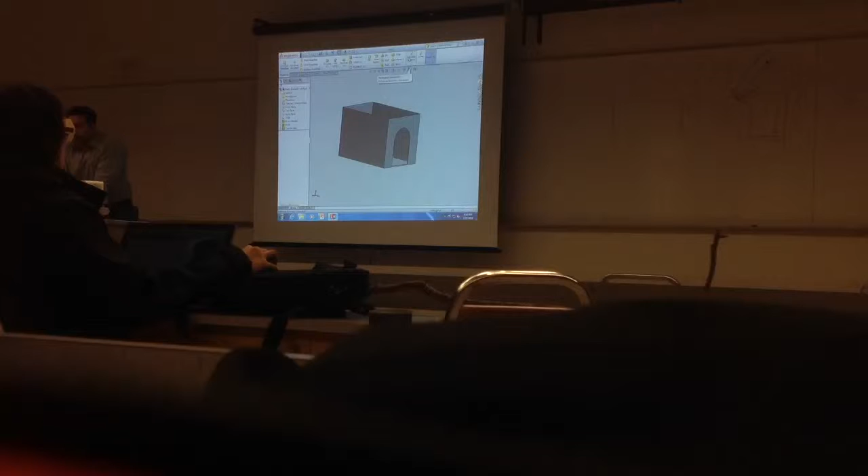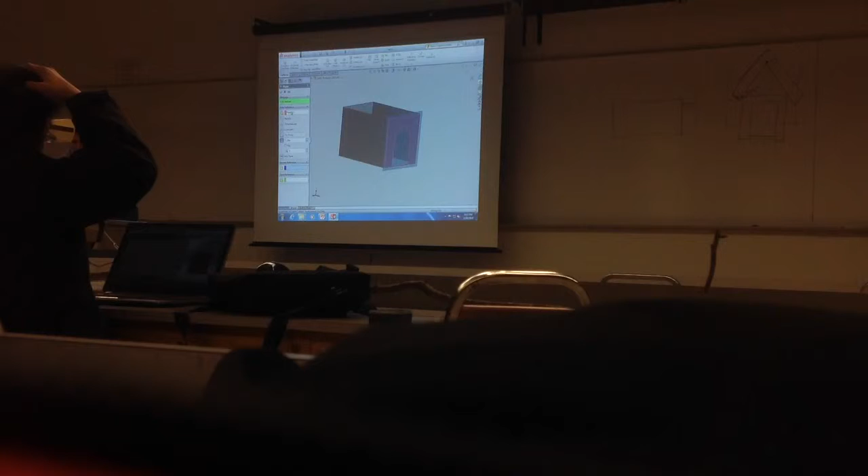The reference geometry, I expand and I click on plane. So it means that I'm going to create the auxiliary reference plane. I click on plane. I click on the front face of my dot as my first reference. So face one is my reference. It gives me a bunch of options for the reference that I choose. The default is distance, which I'm looking for.

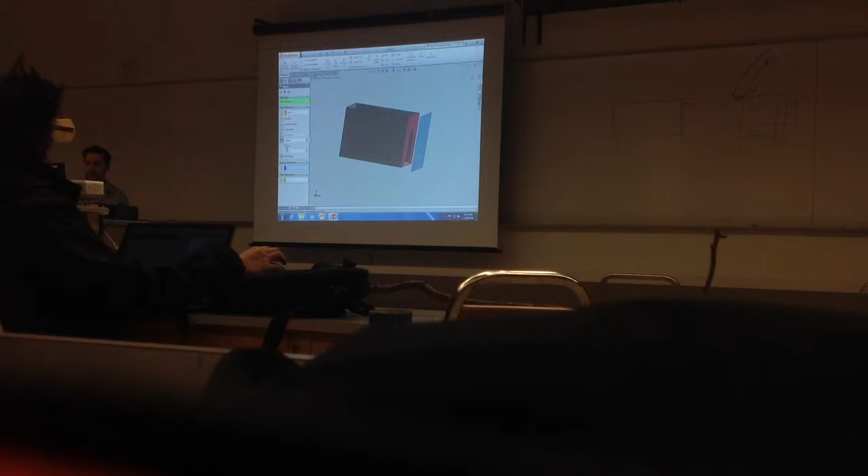For the distance value, I'm going to type 6. I make sure the direction is towards the outside. If it's not, I'm going to flip the direction, which I'm not going to do in this specific case. I simply press OK. So I create the plane as my reference plane, where I'm going to do the sketch of the front of my doghouse, offset at a value of 6 inch.

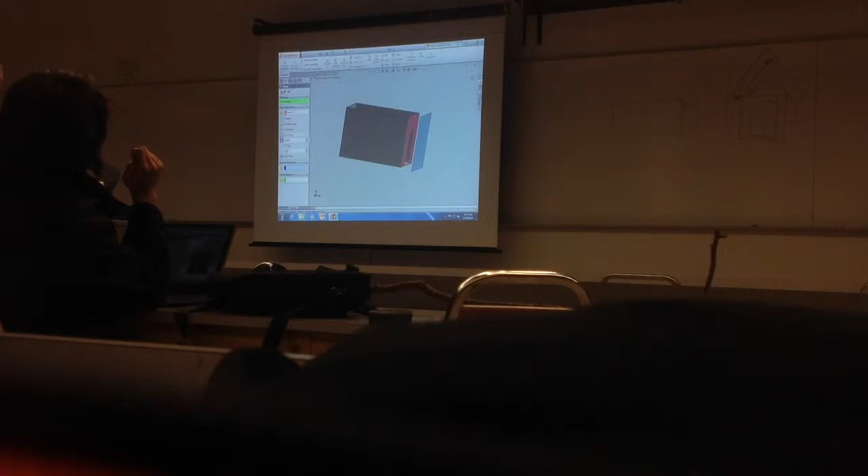Any questions so far? Yes, sir. When you do the first extrusion, maybe it's supposed to use mid plane, so you do things in vertical. Oh, yeah. So when you're doing the extrude, instead of using blind, you use mid plane? For this specific case, like for both ways. So I mean, you can do mid plane.

So for sketch, I think you're saying why don't I do the sketch in the middle, then use a mid plane to extrude on both sides? Yes. That's one way. That's correct. Either way, I have to put the reference plane. I will put the reference plane in the middle, again do the sketch, then use mid plane to extrude on both sides. That's one way to do it, yeah. Correct.

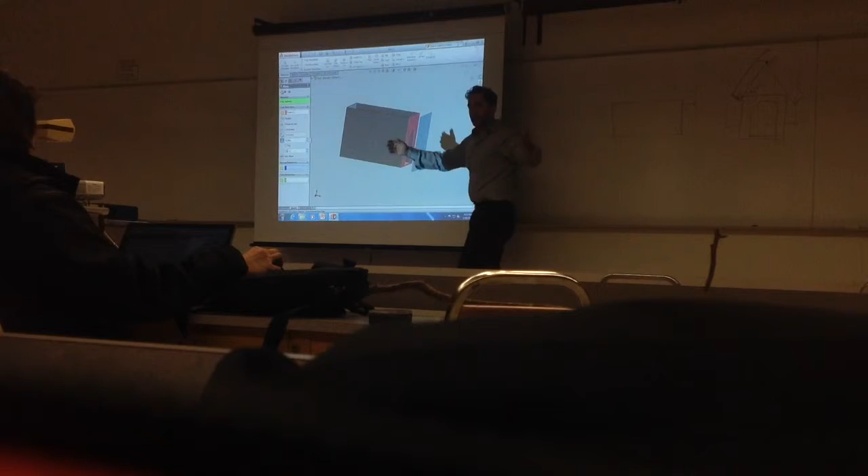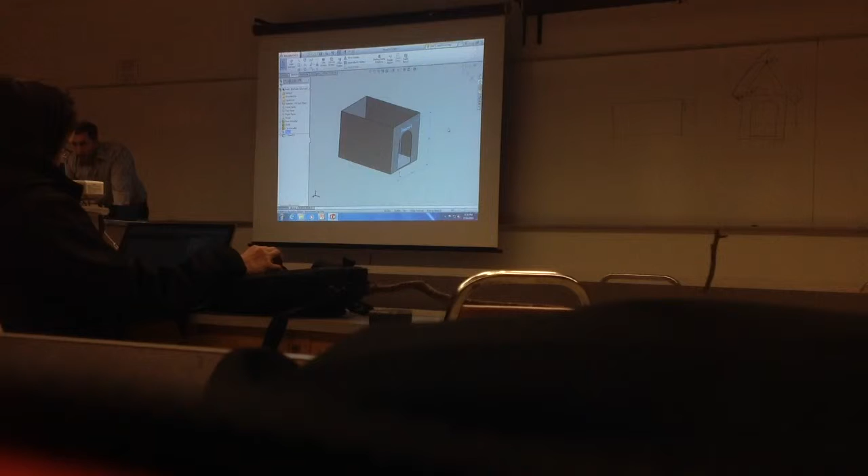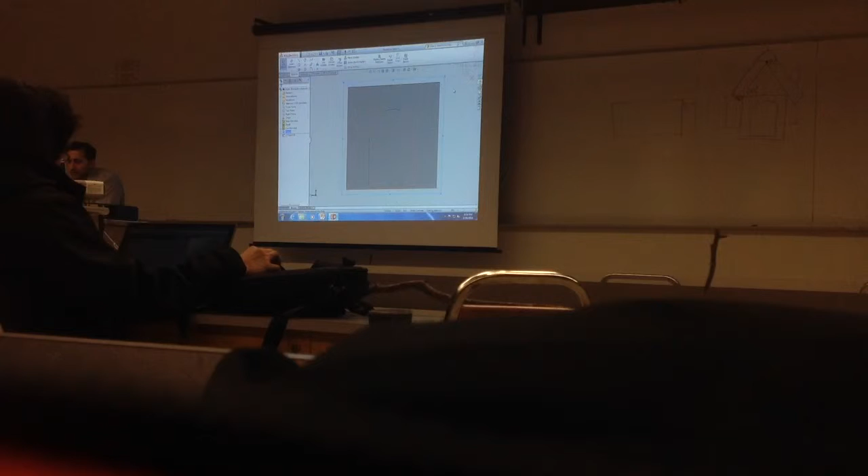So I have this. And I press the green check mark, OK. So I created plane 1, and then I'm going to go to sketch, and I'm going to click on sketch. So plane 1 is my new sketch plane that I'm going to use to create my sketch. So I'm going to make the view normal to my face. Normal. So I'm going to do the same strategy I told you.

First, I'm going to click a line. I'm going to make sure it snaps to the middle, and make sure it becomes vertical, snaps to vertical. I'm going to stretch it up as much as I can. Escape, I'm going to click on the line, and I'm going to use for construction. So I click the first middle line for construction. Click on line?

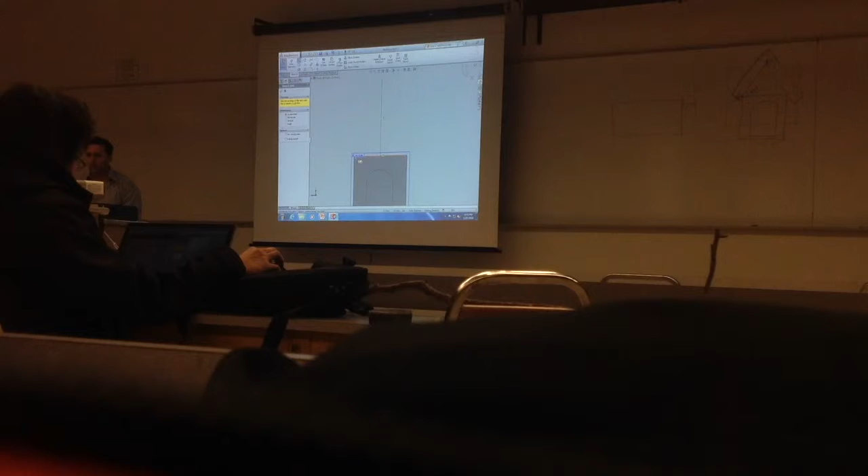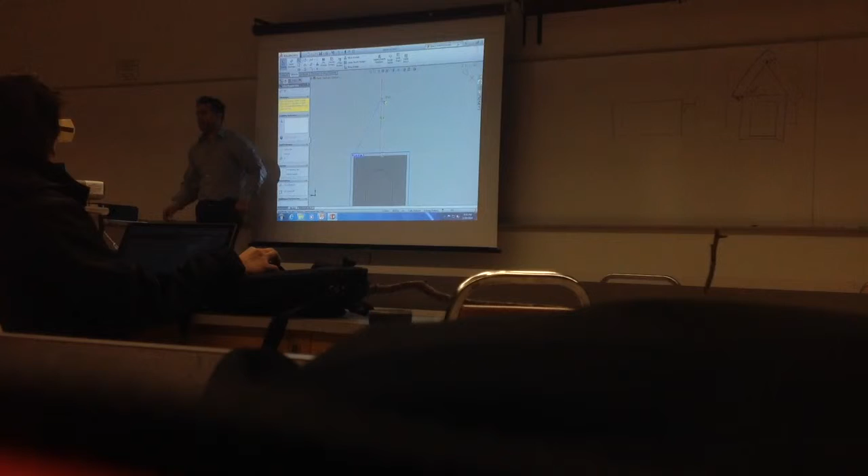Then I'm going to click on the second line again. One end, I'm going to make sure it's coincident on the top corner of my block. And the other end, I make sure it becomes coincident on the line, not in the middle. So make sure you don't select this. And make sure it becomes coincident on the line.

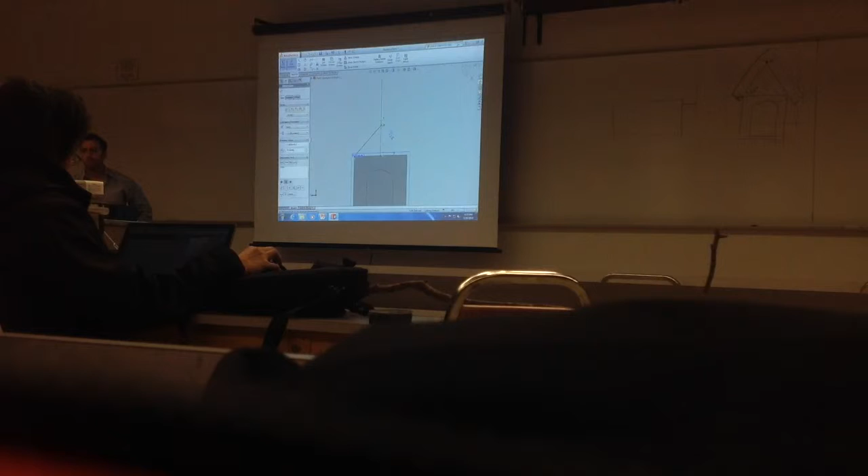And I want to use 45 degree. Is it a solid line or center line? Solid. Click on the horizontal top line and give it an angle of 45 degrees. Did you do it from the corner or random? I want to make this a corner. Mine looks really far away. I click on the line and I click on for construction and press the green check mark, OK. That's what I have.

Yes, sir. What's the difference between a construction line and the center line? Oh, same thing. Yeah, you can go and use the center line, get the same answer. No, he's not clicking it.

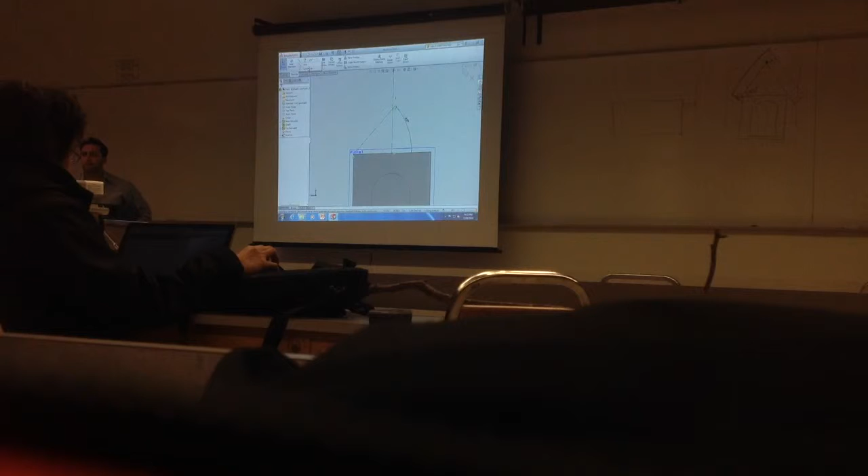Any other question? Is the left side of that line clipped to the corner of the box? Yeah. This corner, I make sure it's coincident on the corner of the box. Okay. And the other end, I make sure it's coincident on the line. This end, you get coincident, yeah, on the line.

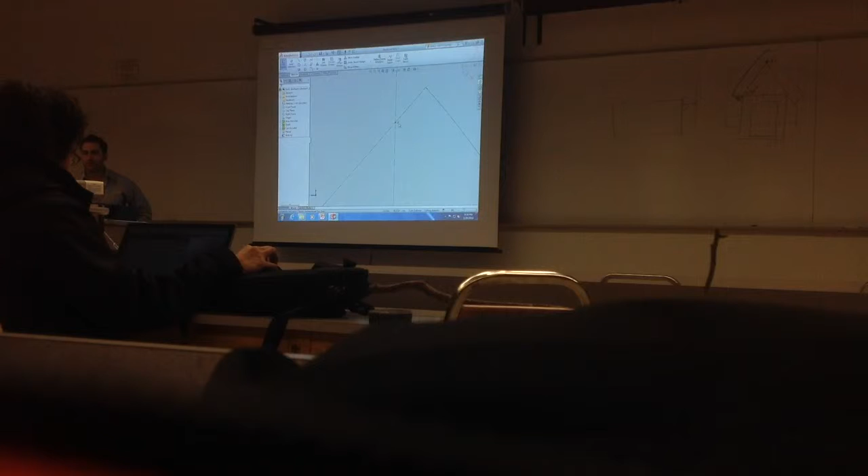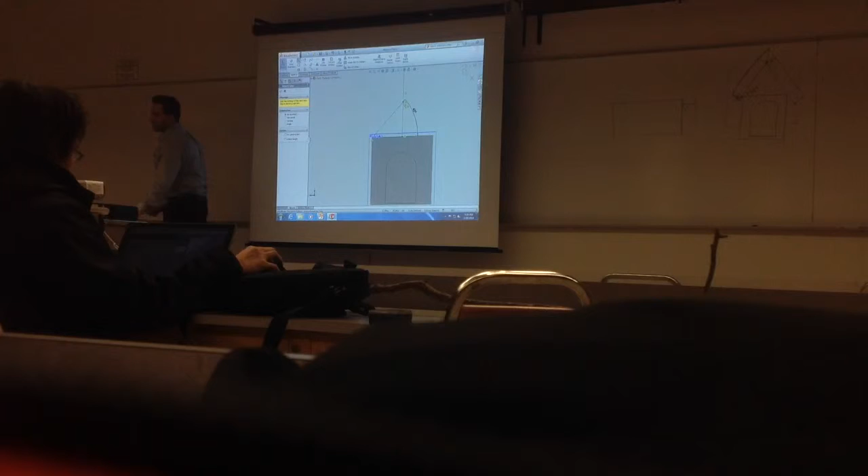So basically, I have everything ready to create my lines. First thing, I'm going to create the bottom line of the roof. So I click line. 45 degrees. I click on this intersection point as the first point of my bottom line of the doghouse. The other point, I click an arbitrary point out there, something like that.

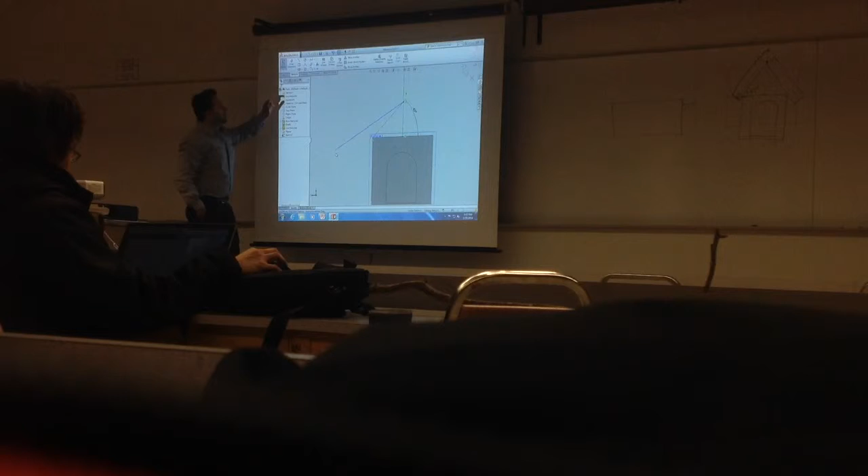I'm not sure. Wait up, I'm trying to see. Professor, my vertical line, how do I make it to be in the middle of the whole? So initially, when you click on the line, you make sure the first one becomes that square, snaps to the middle, so it sits in the middle. Another way to do it, if you have done it already, click on dimension, click on this, click on a line, and give the dimension to be 4 inch on one corner of the box.

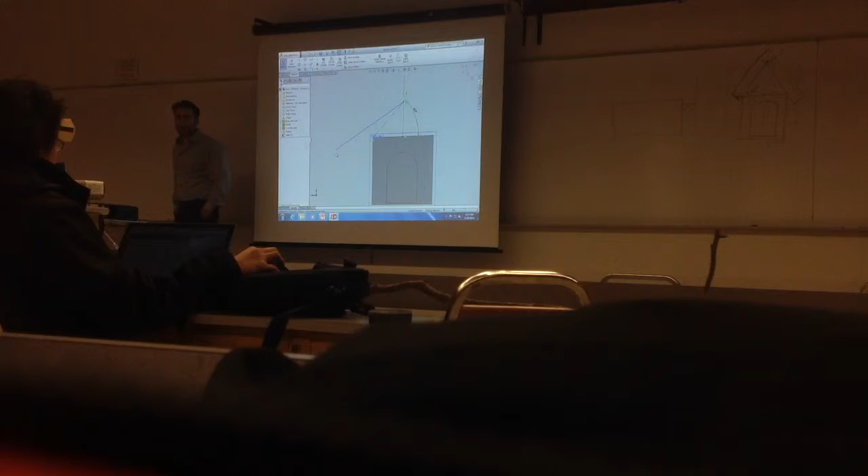But how did he make it degrees too? I'm trying to smart dimension that. I don't know, I still can't figure out the line.

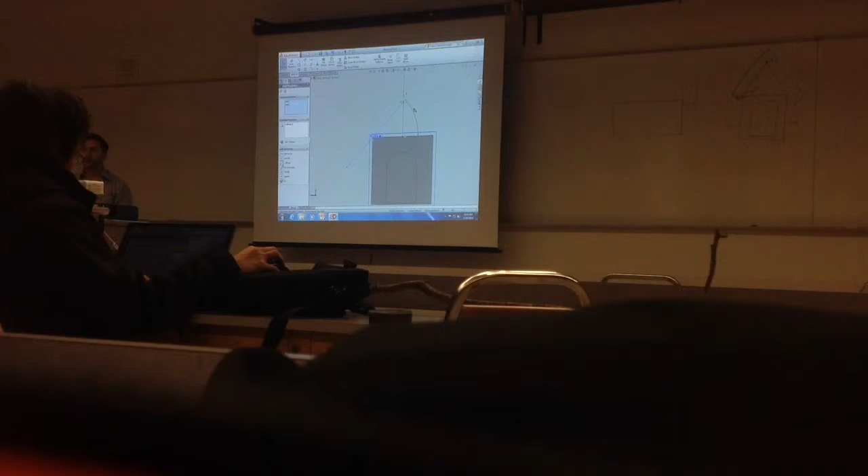So I'm gonna give a relation to make this line to be collinear with this line. So I'm gonna click on the first one, keep the control key down, click on the second line, and give it a relation collinear. See, now it snaps to the direction I'm looking for. The next thing is that I'm gonna give it a dimension of how much? 20 inch. 20 inch. I get the line.

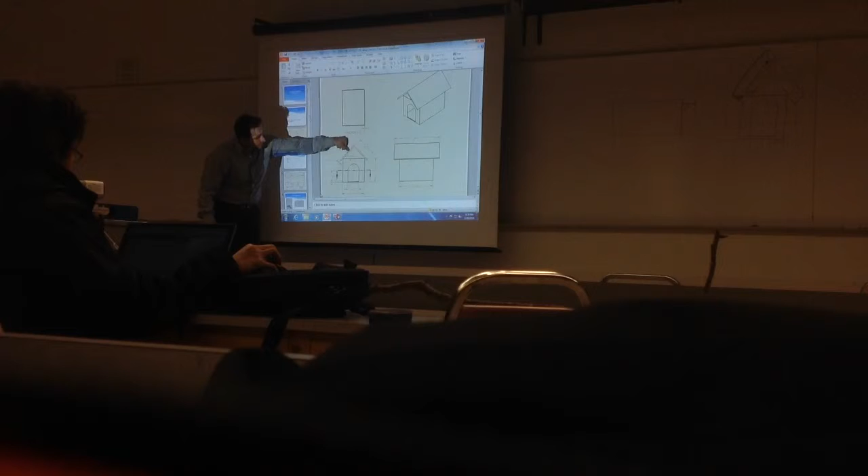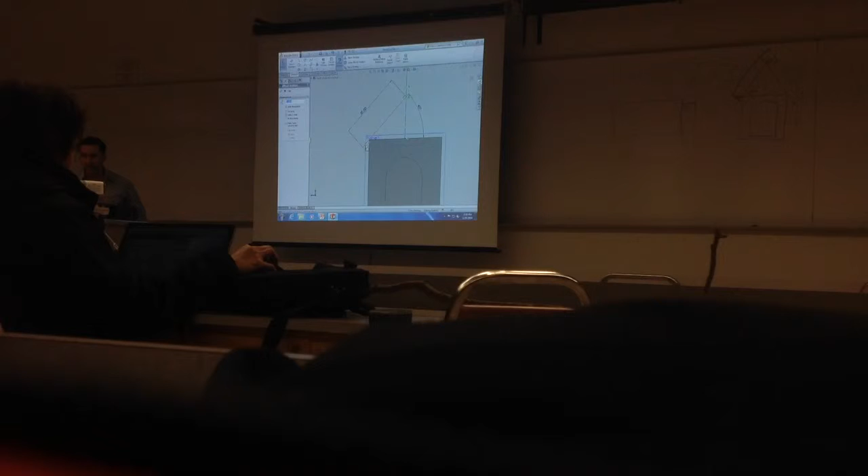The next thing I do, I want to offset this line towards the outside for a value of 1 inch to create the upper part of that. So this is what I did. I created the bottom line. Now I want to create the upper line with the offset for a value of 1 inch. So I go to, let me do this now. Okay. So I go to offset entities in the sketch section. I click on offset entities, click on the line. Offset value is going to be 1 inch.

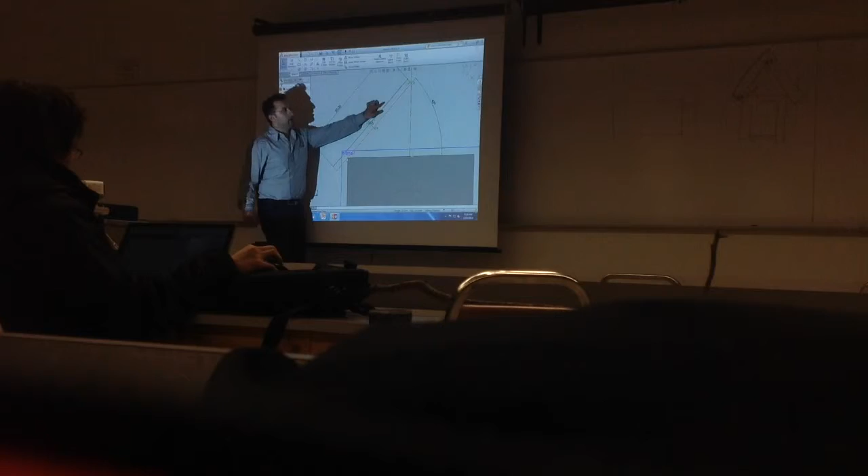This is 45 degrees. So you see, it created the upper part, but it's not perfect. Why? It's missing this gap. So I use the option extend entities in the same section, next to trim entities. If I expand the box, there's the option extend entities.

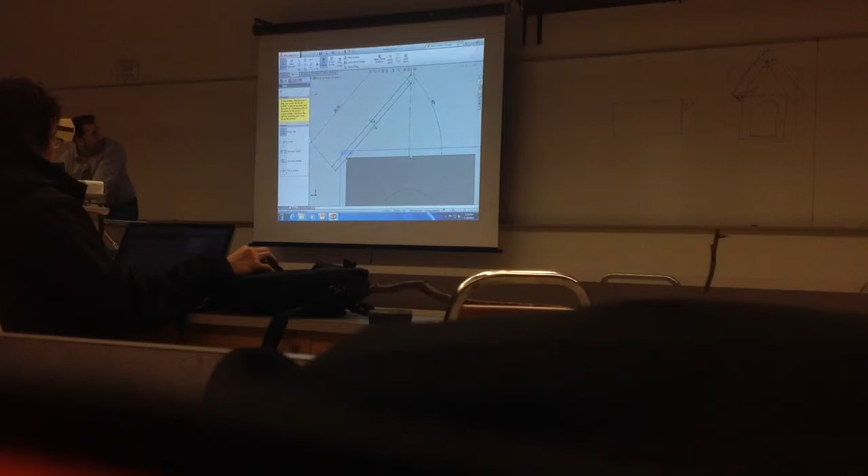Next to trim entities, on the same line, far right? I don't know how to do that. If I click on extend entities, then I move my cursor, see? There you go. I fill this gap. After it's filled, I deselect extend entities. Oh, I got it. What did you do? I have to fill this gap here too. I click on the line, I got it, bro. I fill this gap. What is it? 45.

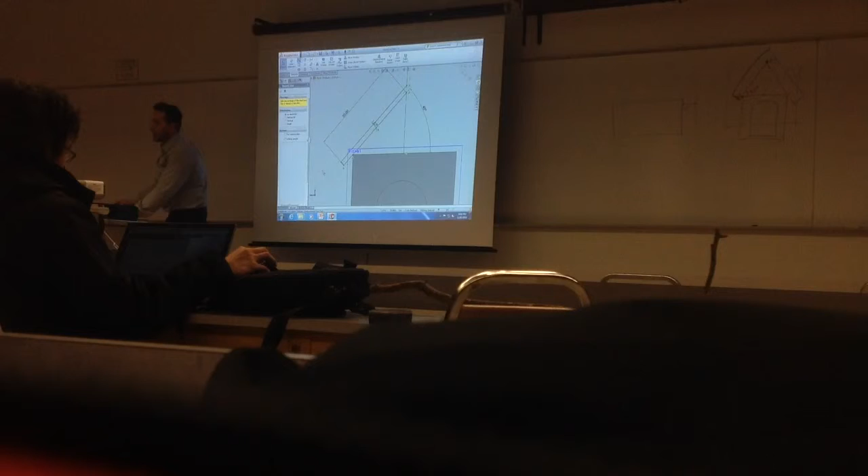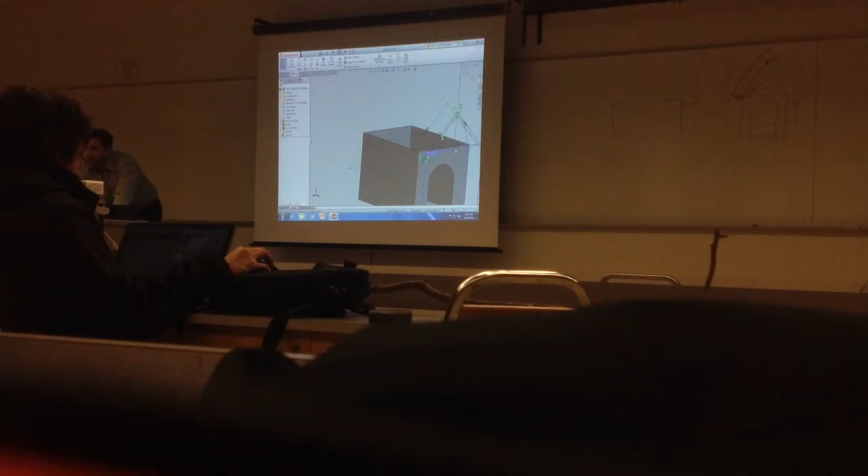Okay. So simply, I created half of the front of the doghouse. I have to create the other half. I use the option mirror entity. I mirror 1, 2, 3 lines over the center line. So simply, I click on mirror entity, what entities I want to mirror: this line, and this line. What I want to mirror it about is the center line. And I simply created the front of my doghouse, which is going to be extruded for a value of 40.

Huh? All on plane one. It's all on the plane that you offset 6 inch from the front. How did he offset it? He drew another line, right? Just like that. Yeah, I don't know the distance though.

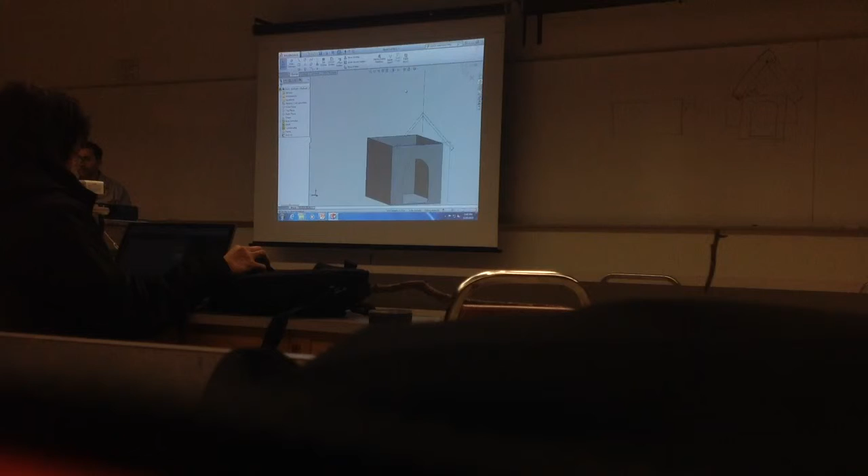If I look from the front view here, you mean this edge, right? So this edge can be selected automatically. Even though it's in a different sketch plane, if I look perpendicularly, I have access to that, so it comes to one plane. That's how I did it. Oh, maybe like this.

So if I click on smart dimension, this edge automatically becomes 5 inches. Even though it's in a different plane, if I look from the perpendicular view, it's going to be the same. I know it's offset. Even though it's in a different plane, if I look from the perpendicular view, I have access to that.

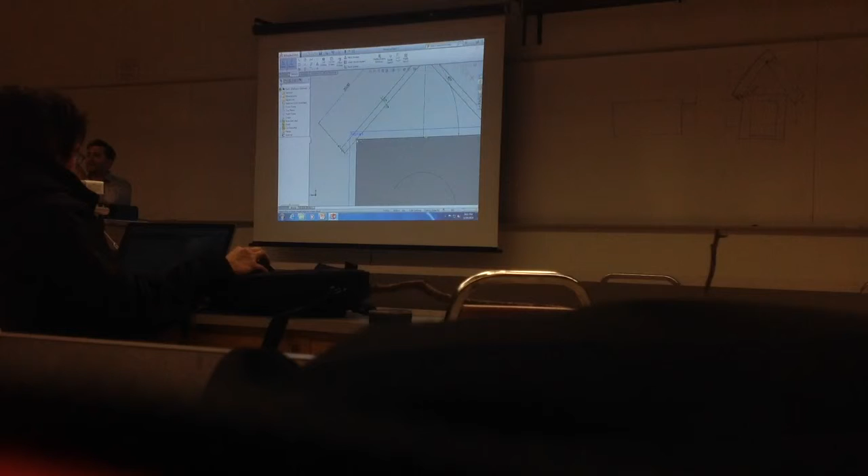Do you draw another line? Yeah, but that's what you do? I don't know. So I'll give you guys a few minutes and then give it to you in the last part.

So at this point, you do offset entities, right? Offset, yeah. Offset direction is reverse. And the offset value is 1 inch. Oh, wow. It's 0.1. Yeah, it should be 1 inch. Okay. This should be 20 inch, right? So that line should be 20?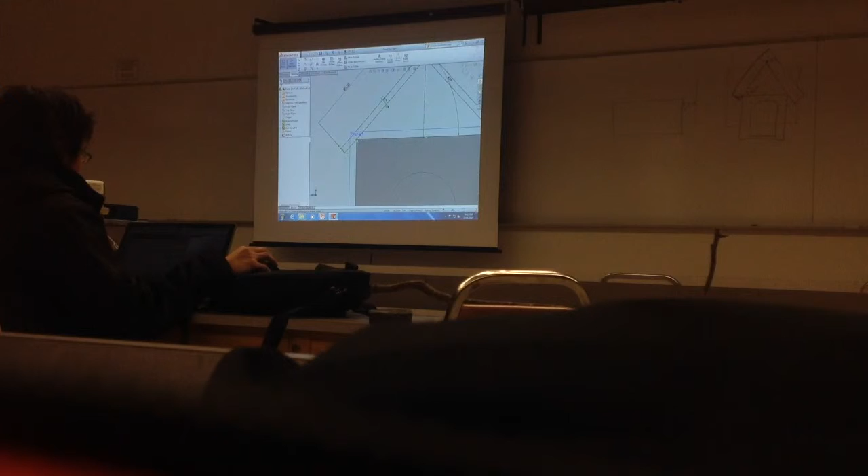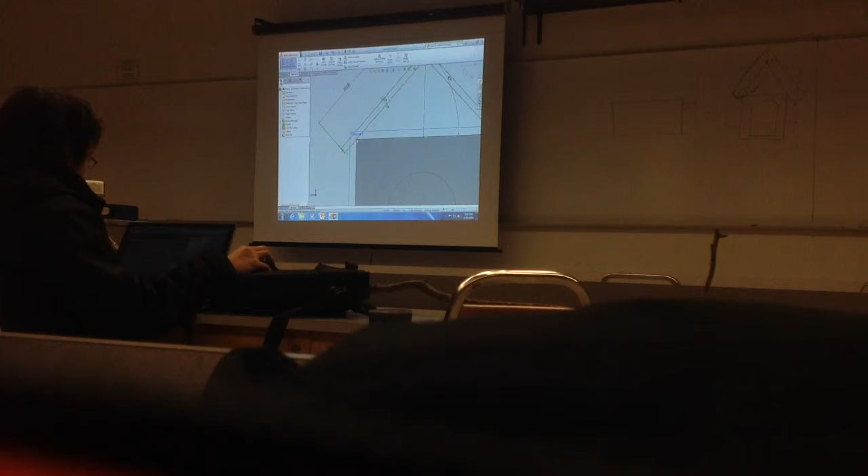Yeah, this is a construction line. So you do this for construction, and then after you do this, you go to this line, make sure it snaps here, and then the dimension of this line is... so slow. Oh, my bad. Then you go to offset entities, you click on this line, and then you give it a 1. There you go.

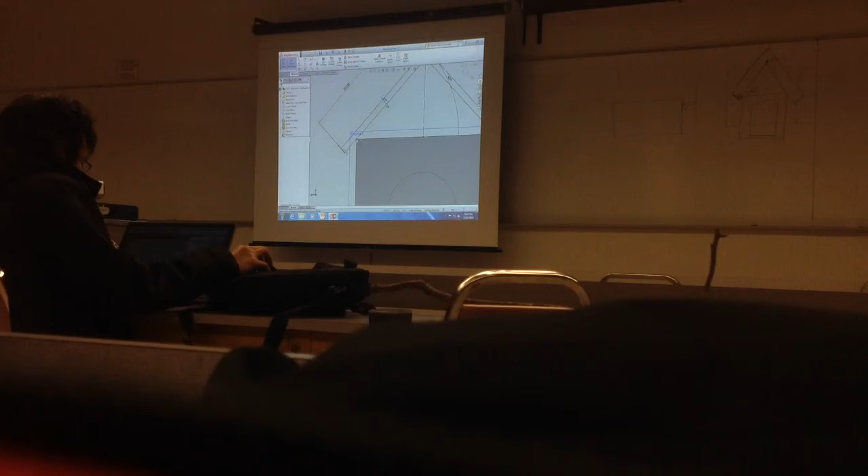So he drew a line. So the line, is this another line or is it all one? He drew a line, and then he drew another line, and then he did offset entities. How did you get that line? He drew another line. And then that one should be 20, but you should have done it before. So you drew another line? Well, no, you already have 2 lines. So you're supposed to do it at 20. So I drew that second line, right? Yeah, but you do 20 first. For the big one? Yeah, 20.

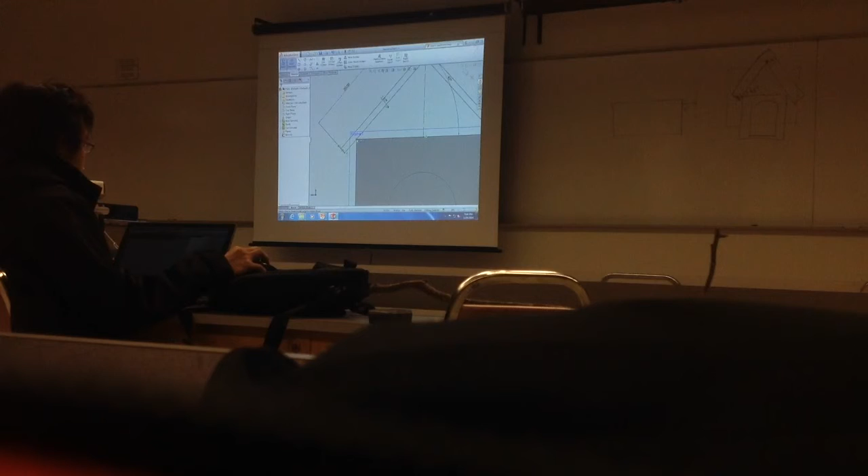Okay, I need help. 20. How? Do another line? Delete that other line. Delete this one? Yeah. So what do you do with this one? You make it 20. With smart dimension? Yeah. Like this? 20, yeah. You're not supposed to do that. Up there, go back. Arrow. There.

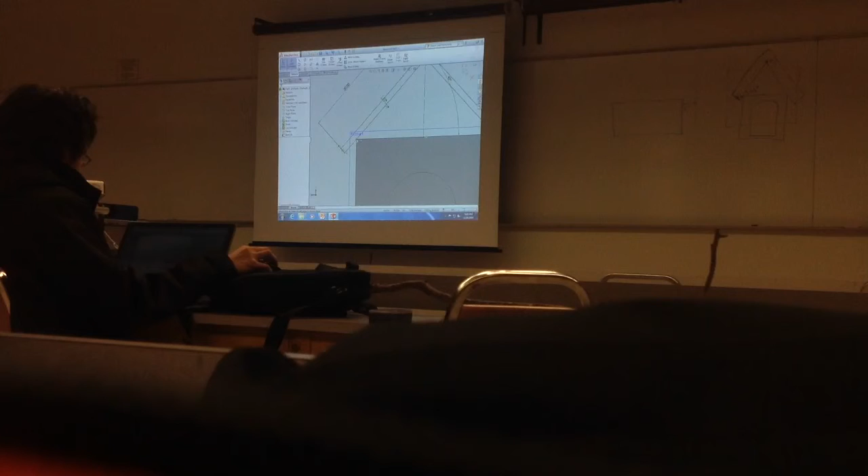Okay, so you make this line, hook it up here, 45 degrees. You already did 20? Yeah. So the next thing you do is you draw another line, and then you do offset entities, and then you do 1 inch. I already did that. So I'm gonna just finish the last step. Once I do this, the last step is I'm gonna extrude this for a value of 48.

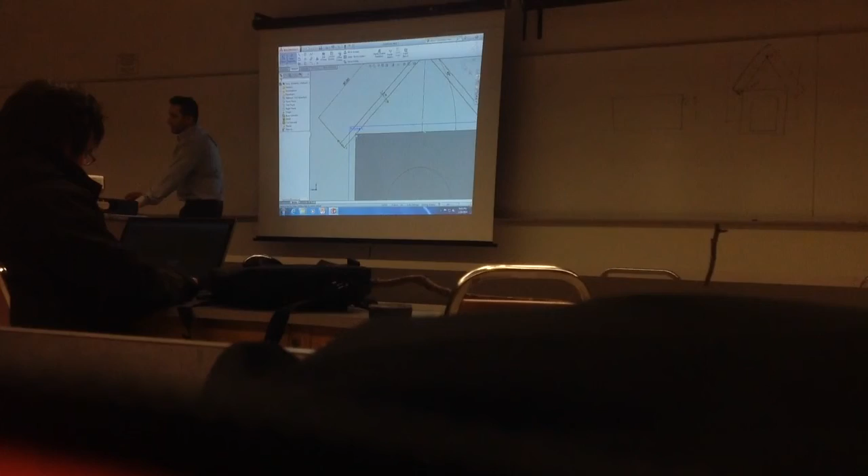Yeah, I'll put it up on YouTube. So simply I go to extrude, make the extrusion direction the right direction, so I'm gonna go reverse direction for a value of 48. Get out of the smart dimension. So that's it for today's tutorial.

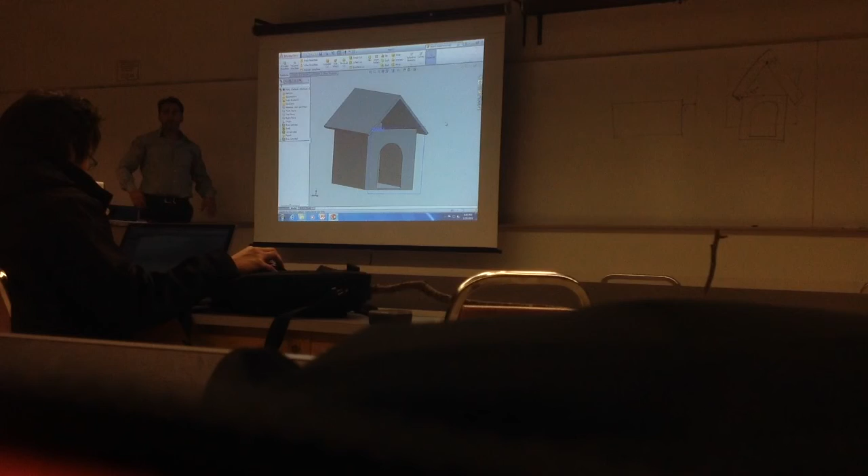We learned about construction lines, simply how to do 2D drawing in SolidWorks, how to modify the sketch, how to do offset, how to mirror, how to extrude, how to do extrude cut, how to do a shell. And in the next lecture, we're gonna talk about revolve, sweep, revolve cuts. And followed by that, we're gonna work on that.